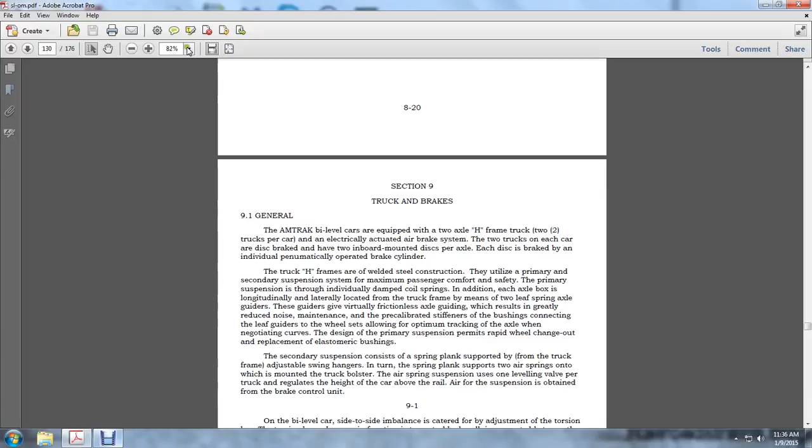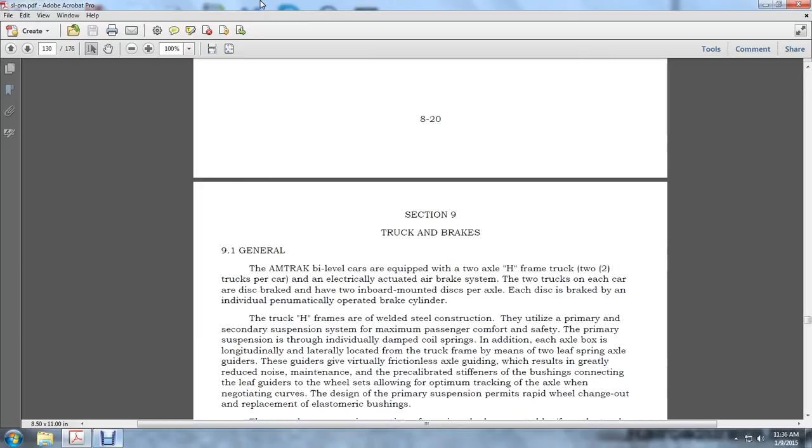Section 9, Truck and Brakes. General: the Amtrak bi-level cars are equipped with two-axle, H-frame, two trucks per car, and an electrically actuated air brake system. The two trucks on each car are disc brake and have two inboard mounted brake discs per axle. Each disc is braked by an individual pneumatically operated brake cylinder.

The truck H-frame is welded steel construction and utilizes a primary and secondary suspension system for maximum passenger comfort and safety. The primary suspension is formed by individual damped coil springs. In addition, each axle box is longitudinally and laterally located from the truck frame by means of two leaf spring axle guiders.

The guiders give virtually frictionless axle guiding, which results in greatly reduced maintenance, and pre-calibrated stiffness of the bushing connections of the leaf guiders to the wheel set allows optimum tracking of the axle negotiating curves. The design of the primary suspension permits rapid wheel set replacement and elastomeric bushings.

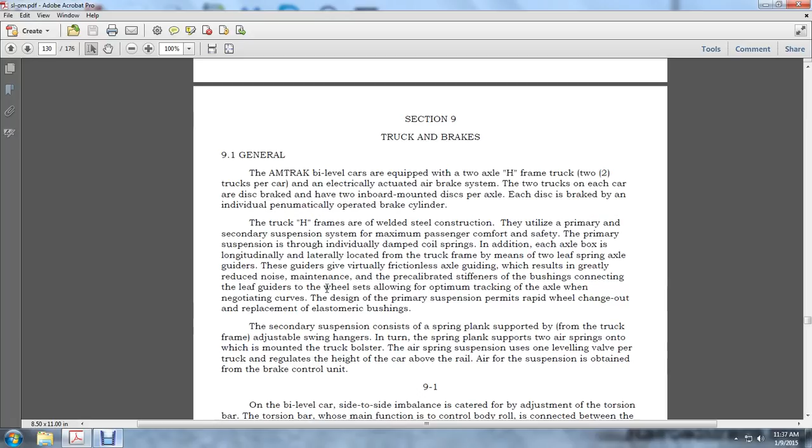The secondary suspension consists of a spring plank supported by the truck frame, adjustable swing hangers, and the spring plank in turn supports two air springs onto which is mounted the truck bolster. The air spring suspension, using one leveling valve per truck, regulates the height of the car above the rail. Air for the suspension is obtained from the brake control unit.

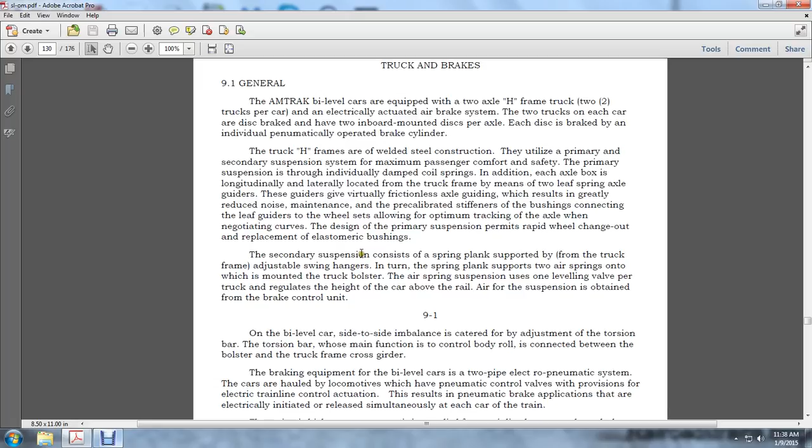On the bi-level car, side-to-side imbalance is catered for by adjustment of the torsion bar. The torsion bar, whose main function is to control body roll, is connected between the bolster and the truck frame cross girder. The brake equipment of the bi-level car is a two-pipe electro-pneumatic system.

These cars are hauled by locomotives with pneumatic control valves with provisions for electric trainline control actuation. The result is pneumatic braking applications that are electrically initiated or released simultaneously at each car of the train. The main air high pressure reservoir is supplied with trainline pressure through the car supply line. It receives air pressure from the locomotive air compressor and maintains the supply reservoir at 130 to 150 psi.

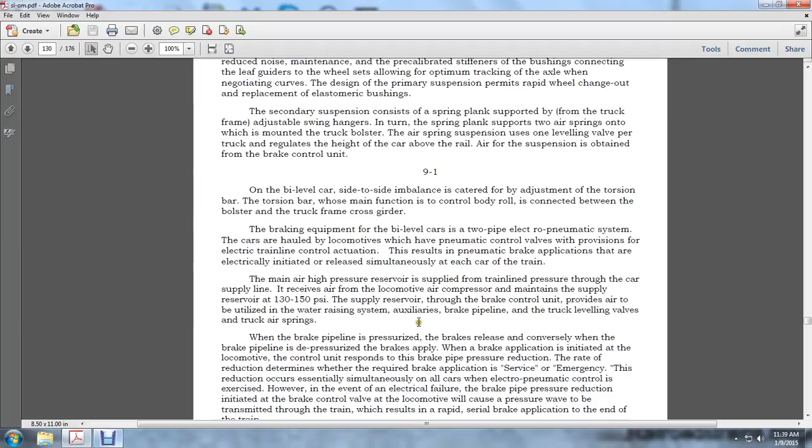The supply reservoir, through the brake control unit, provides the air utilized in the water raising system, auxiliaries, brake pipeline, and the truck leveling valves and truck air springs. When the brake pipe is pressurized, the brakes release. When the brake pipe is depressurized, the brakes apply. When a brake application is initiated at the locomotive, the control unit responds to the brake pipe pressure reduction. The rate of the reduction determines whether the required braking application is service or emergency. This reduction occurs essentially simultaneously on all the cars.

when electro-pneumatic control is exercised. However, in the event of electrical failure, the brake pipe pressure reduction initiated by the brake control valve of the locomotive will cause a pressure wave to be transmitted through the train, which will result in rapid serial braking application to the end of the train.

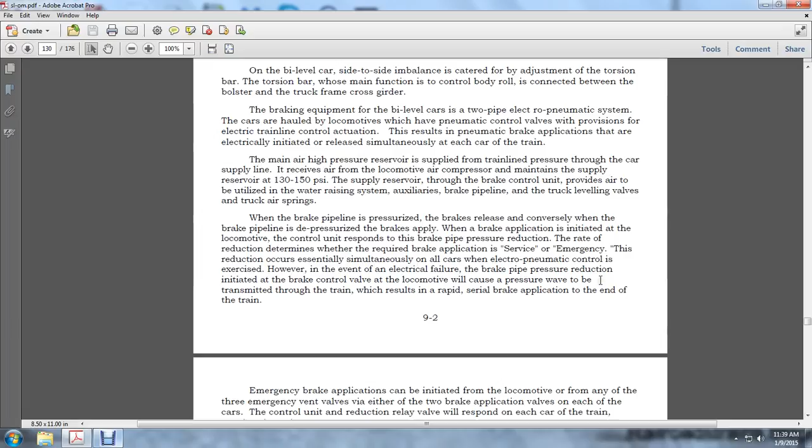A train emergency brake application is initiated from the locomotive or from any of the three emergency vent valves, via either of the two brake application valves. In each case, the control unit reduction relay responds on each car of the train, causing an emergency stop.

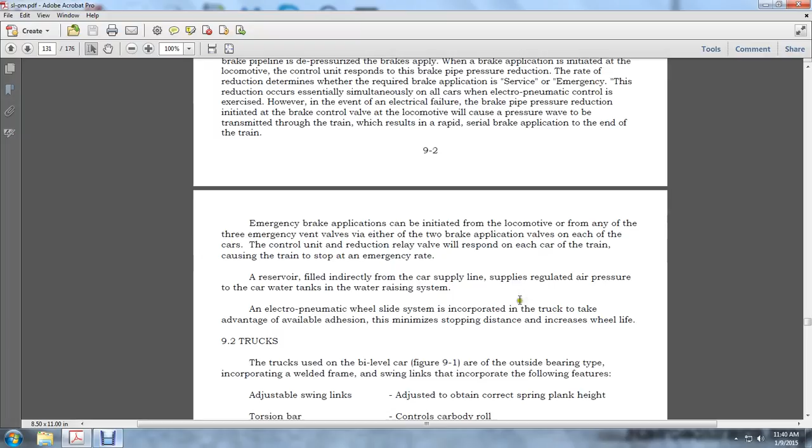The reserve, filled indirectly from the car supply line, supplies regulated air pressure to the car water tanks in the water raising system. The electro-pneumatic wheel slide system incorporated with the truck takes advantage of available adhesion, minimizing stopping distance and increasing wheel life.

9.2, The Trucks. The trucks of the bi-level car are the outside bearing type, incorporating a welded frame and swing links, incorporating the features: adjustable swing links to obtain the correct spring plank height; the torsion bar to control car body roll; hydraulic shock absorbers to damp oscillation; primary and secondary suspension, the primary suspension controlling wheel-rail interaction.

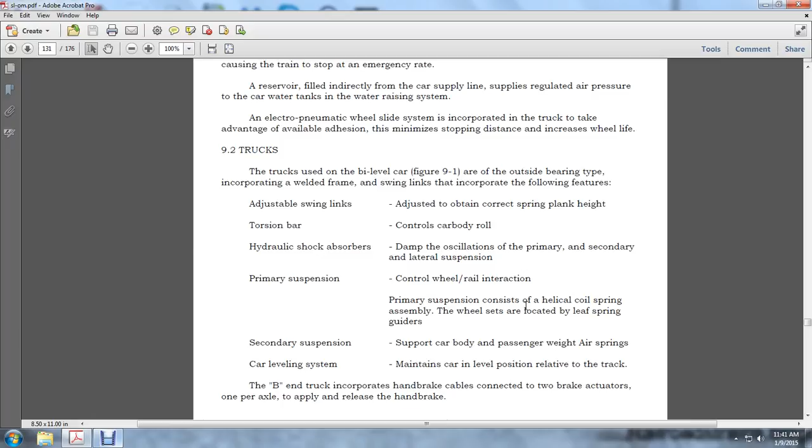The primary suspension consists of helical coil springs, with the wheel sets located in leaf spring guiders. The secondary suspension carries car body and passenger weight on air springs, with a car leveling system that maintains the level position relative to the track. The B end of the truck incorporates the handbrake control cables connected to two air brake actuators, one per axle, to apply and release the handbrake.

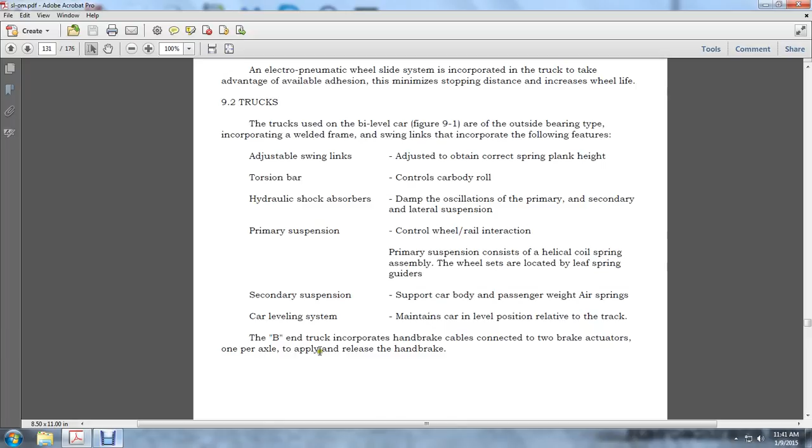Back out of this one sec.

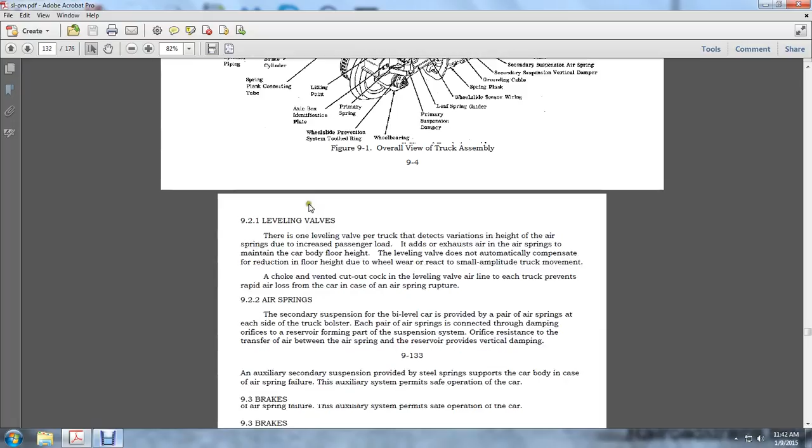9.2.1 Leveling valves. One leveling valve per truck compensates for the variation of the height of the air spring due to increased passenger load, adding or exhausting air in the air springs to maintain the car body floor height. The leveling valve does not automatically compensate for the reduction of floor height from wheel wear, or react to small amplitude truck movement.

The choke of the cutout cock of the leveling valve in the airline of each truck prevents rapid air loss from the car in case of an air spring rupture.

9.2.2 The air springs. The secondary suspension of the bi-level car is provided by a pair of air springs at each side of the truck bolsters, and each of the pair of air springs is connected by a damping orifice to a reservoir forming part of the suspension system. Orifices resisting the transfer of air between the air spring and the reservoir provide the vertical damping.

An auxiliary secondary suspension provides steel spring support of the car body in case of air spring failure. The auxiliary system permits the safe operation of the car.

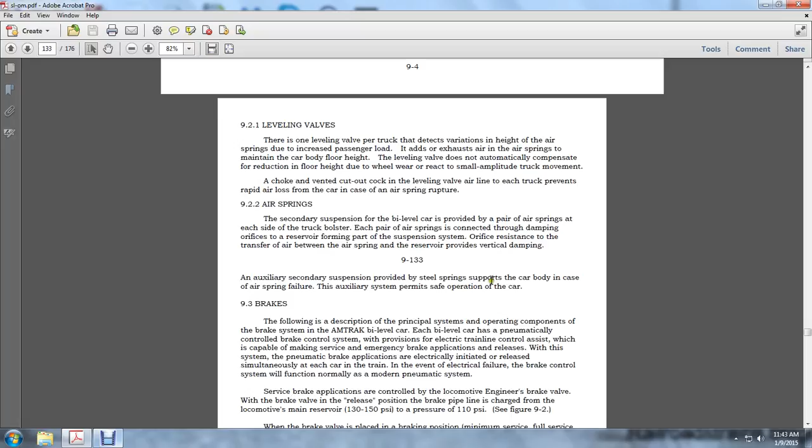9.3 The brakes. The following is a description of the principal operating components of the brake system of the Amtrak bi-level car. Each bi-level car has a pneumatically controlled brake system, which provides electrical train line control assist and is capable of making service and emergency applications and releases. With this system, pneumatic brake applications are electrically initiated and released simultaneously at each car. In the event of electrical failure, the brake control will function normally as a modern pneumatic system.

Service brake application is controlled by the locomotive engineer's brake valve. With the brake valve in the release position, the brake pipeline is charged from the locomotive main reservoir at 130 to 150 psi, to a pressure of 110 psi. The brake valve is placed in the brake positions: minimum service, full service, suppression, handle off, or emergency, to initiate the separate braking functions.

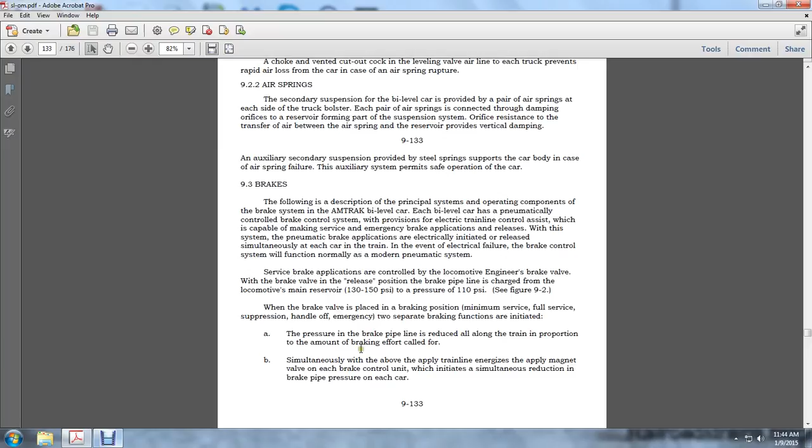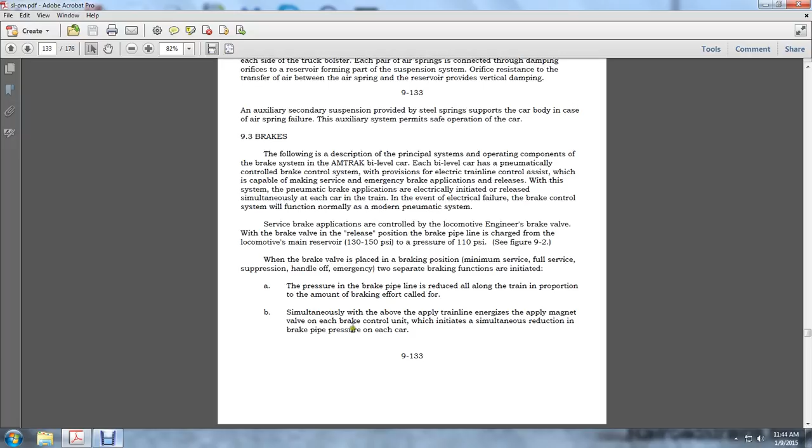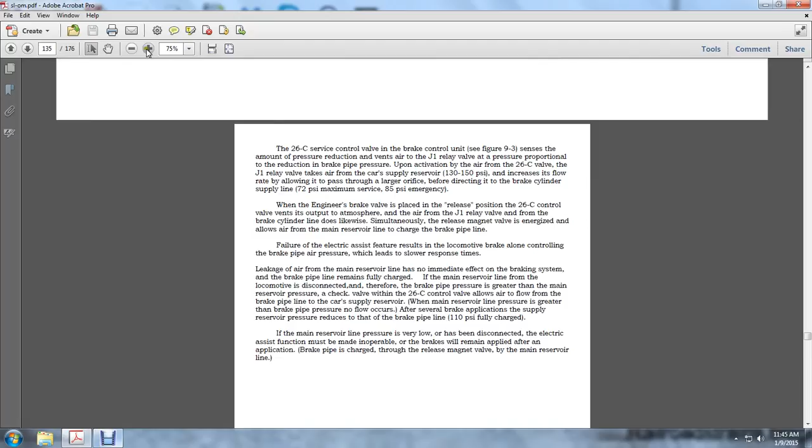26-C service control valve in the brake control unit. Sensitive to the amount of pressure reduction, it vents air to the J1 relay valve in proportion to the reduction of the brake pipe upon activation of the 26-C valve. The J1 relay valve takes air from the car supply reservoir and increases the rate, allowing passage through the large orifice before directing the brake cylinder supply to 72 psi maximum service, 85 psi emergency.

When the engineer's brake valve is placed in the release position, the 26-C valve vents to atmosphere the air for the J1 relay, and the brake cylinder line does likewise. Simultaneously the release magnet is energized, which allows the main reservoir line to charge the brake pipe. The electrical assist aids the locomotive braking, which otherwise controls brake pipe air pressure alone and leads to slower response time. Leakage of the main reservoir air has no immediate effect on the braking system.

The brake pipe remains fully charged if the main reservoir line from the locomotive is disconnected. When the brake pipe pressure is greater than the main reservoir pressure, a check valve of the 26-C control valve allows air to flow from the brake pipe to the car supply reservoir. When the main reservoir pressure is greater than the brake pipe pressure, no flow occurs. After the brake application, the supply reservoir pressure reduces to that of the brake line, at 110 psi fully charged.

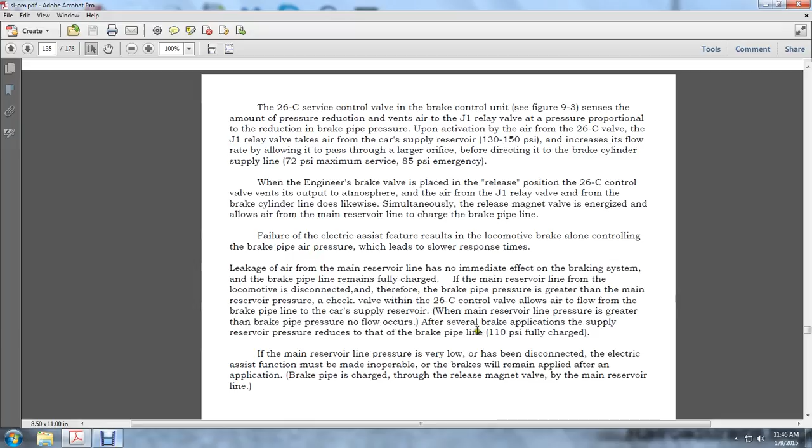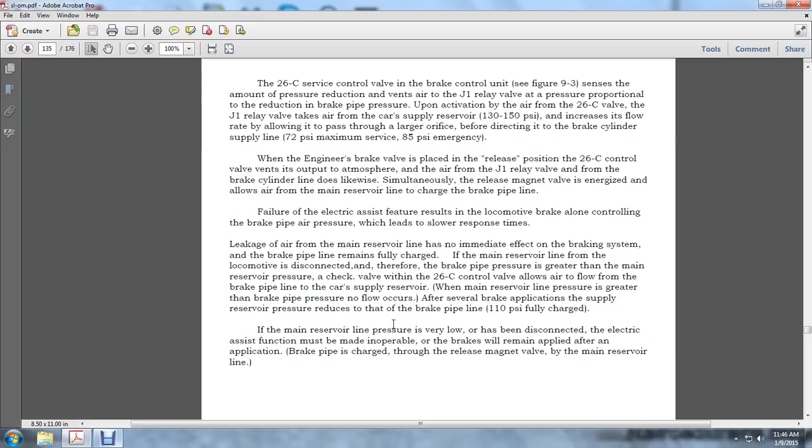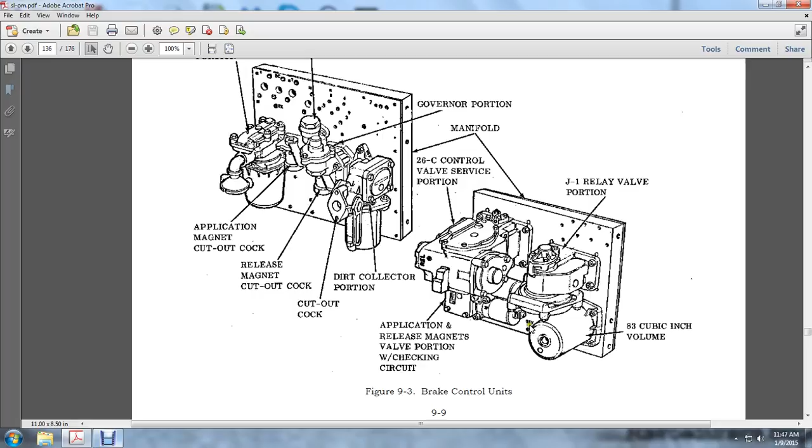Dirt collector portion, cutout cock, release magnet cock, application magnet cock. These are usually the brake control units. See this in the front of the locomotive with the glad hand and everything. The 26-C control valve service portion, the J1 relay valve, the 83 cubic inch volume, application release magnet valve portion, and circuit.

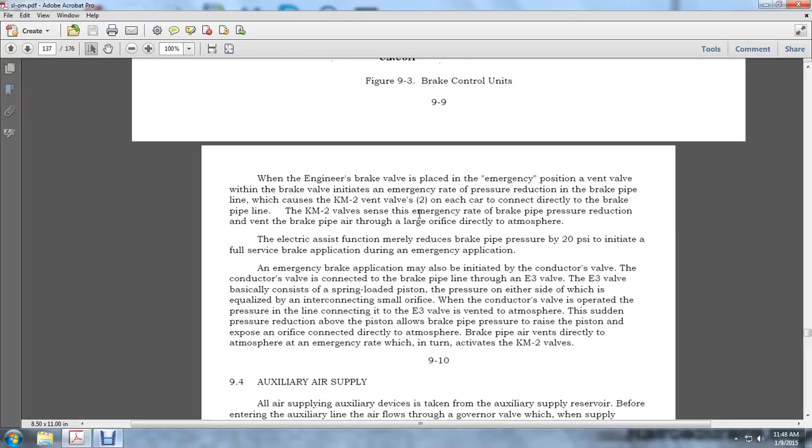When the engineer places the brake valve in emergency position, the vent valve initiates the emergency rate of brake pipe reduction, in which case the KM2 valve on each car connects directly to the brake pipeline. The KM2 valve senses the emergency rate of brake pipe pressure reduction and vents the brake pipe air through the large orifice to the atmosphere.

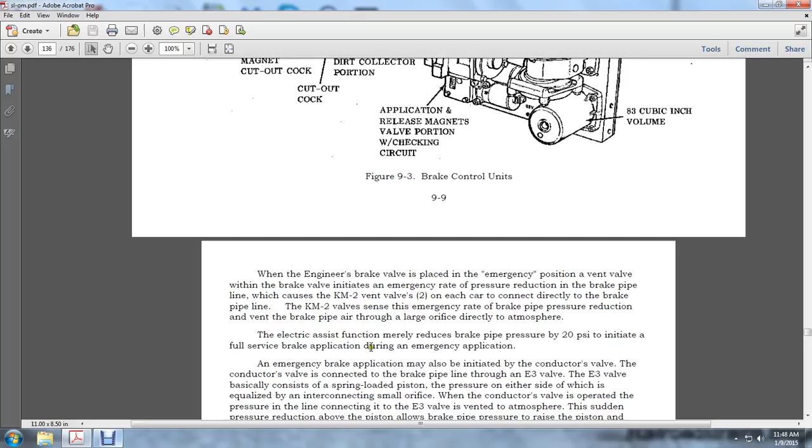So you got this KM2 valve in an emergency position. Electrical assisted function merely reduces the pipe pressure by 20 psi, initiating the full service brake application during the emergency application. An emergency brake application can be initiated with the conductor valve. The conductor valve is connected with the brake pipe line through the E3.

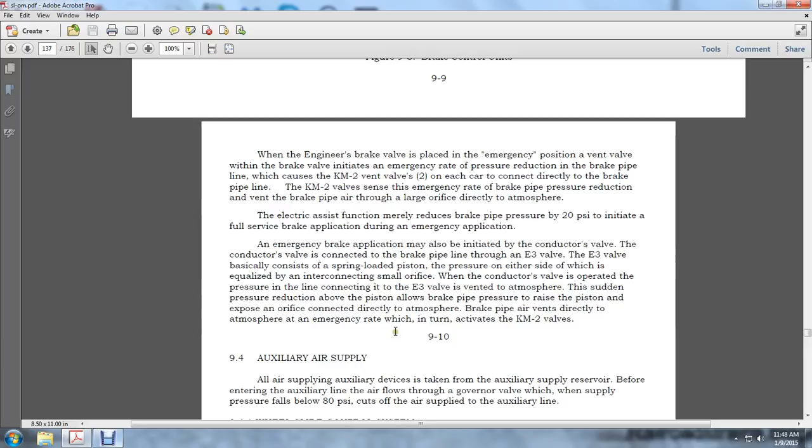The E3 basically consists of a spring-loaded piston, the pressure on either side of which is equalized through interconnecting small orifice. When the conductor valve is operated, the pressure connecting the E3 valve is vented to the atmosphere. The sudden pressure reduction allows the brake pipe to raise the piston, exposing an orifice connected directly to the atmosphere. The brake pipe air vents directly to the atmosphere at the emergency rate, activating the KM2 valves.

The auxiliary air supply. The auxiliary air supply is taken by the auxiliary supply reservoir before entering the auxiliary line. Air flows to the governor valve, which, if the supply pressure falls below 80 psi, cuts off the air supply to the auxiliary line.

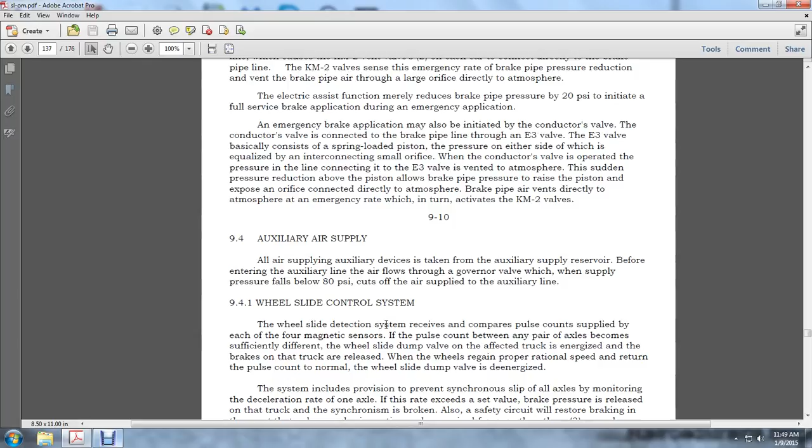And 9.4.1, wheel slide control. The wheel slide detection system receives the pulse count supplied by each of the four magnetic sensors. If the pulse counts between the axles become sufficiently different, the wheel slide dump valve of the affected truck is energized and the brakes of the truck release. When the wheels regain proper rotational speed, the pulse count returns to normal.

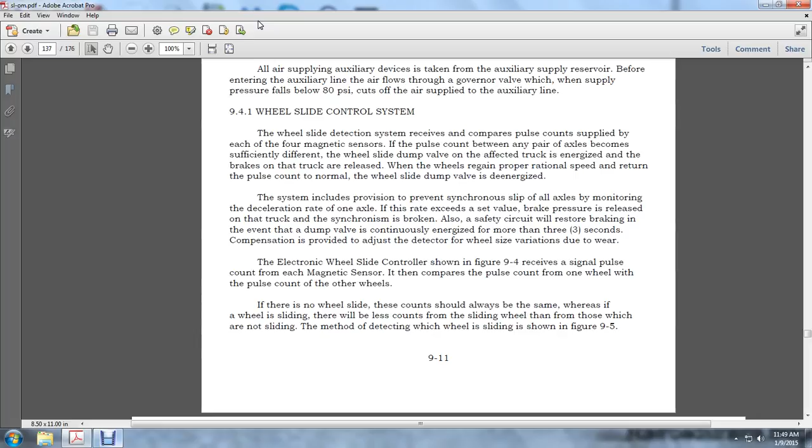The wheel slide dump valve is de-energized. The system includes a provision to prevent synchronized slip of the axles, monitoring the deceleration rate of one axle. If this rate exceeds the set value, the brake pressure is released on the truck and the synchronizing is broken. Also, safety circuits restore the braking if the dump valve is continuously energized for more than 3 seconds. Compensation is provided to adjust the detector for wheel size variation due to wear.

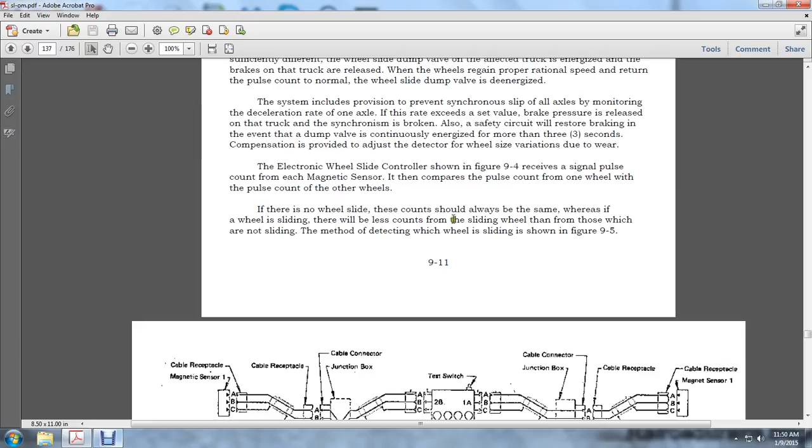The electronic wheel slide controller shown in figure 9.4 receives a signal pulse count from each magnetic sensor. It compares the pulse counts of one wheel to the pulse counts of the other wheels. If there is no slide, the counts should always be the same, whereas with wheel sliding, fewer counts will be counted for the sliding wheel than for those which are not sliding. The method of detecting wheel sliding is shown in figure 9.5.

Here you see 9.4, the wheel slide control schematics. Note the controller is located in the electrical locker. The receptacles A, B, and C in the front of the B end, with the wheel slide valve, wheel slide dump valve, and through a cable connector to the junction box of the cable receptacles on both the A and B side, with A, B, and C receptacles going from the 4 marked spots, which are the cable receptacles that test for the wheel slippage when it's at different speeds.

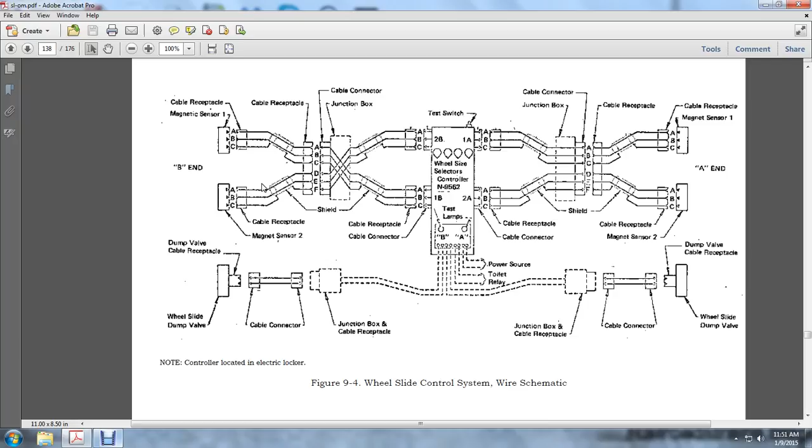The cable receptacles go into the cable connector junction box, and from the junction box, the 4 spots of the wheels that they test on each A and B side go into the wheel size selectors controller N-8562, 1B, test lamps of B and A switches. This is the wheel slide control wire schematic.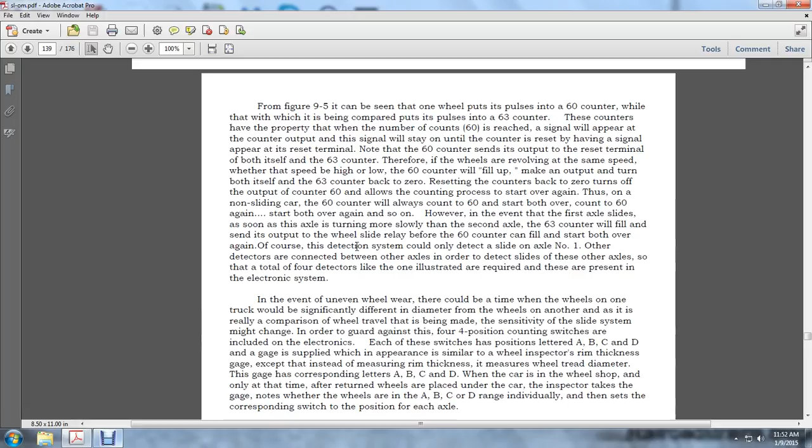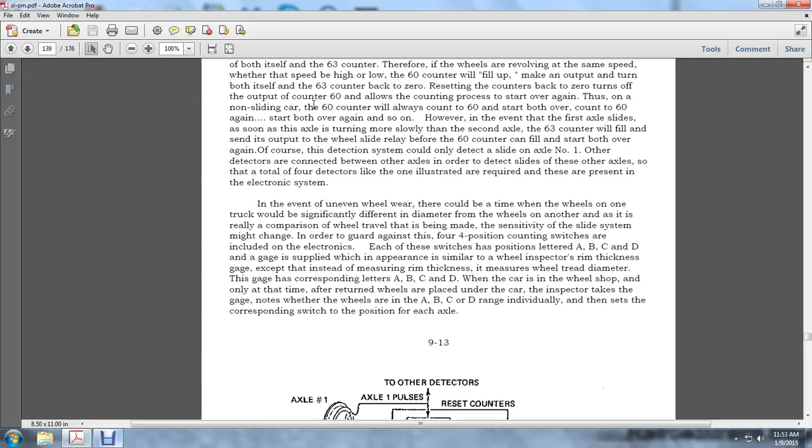The wheel car goes to the wheel shop. Only the wheels that return are placed under the car. The inspector takes the gauge and notes that the wheels are A, B, C, or D, gauging them individually, then sets the corresponding switch position for each axle.

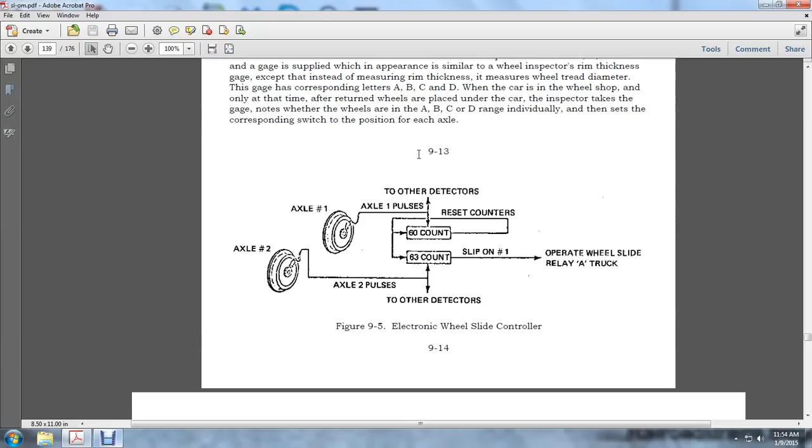Since it's a digital rather than an analog system, there is no necessity for calibration or fine tuning of any kind. It is never necessary to reset calibration switches between wheel turnings, because the amount of wheel wear between turnings is only 1/2 an inch.

The system will operate successfully with that much difference between the wheels without necessity to change the compensation switch position, and it is necessary to protect the dump valves against false energization.

This is because if the wheel slide system failure energizes the dump valve for an extended period of time, the braking on the car would be reduced by 50%.

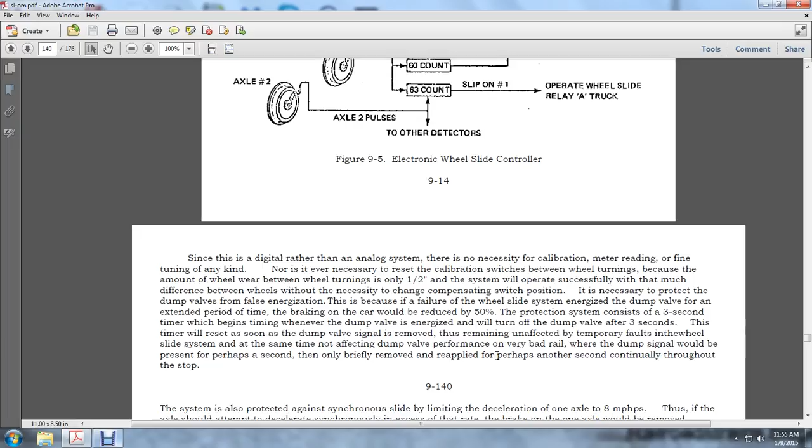The system also protects against synchronized slide, limiting deceleration on one axle to 8 miles per hour per second. Thus, should the axle attempt to decelerate synchronized in excess of that rate,

9.4.2 water raising system. Air flows from the auxiliary line of the water tanks through the pressure reducing valve, which reduces pressure from 130-150 psi down to 40 psi. The supply also feeds the buffer volume at 40 psi. The line contains a safety valve to prevent over-pressurizing the water tank, and cutting-out cocks for depressurizing the tanks while filling inside the car.

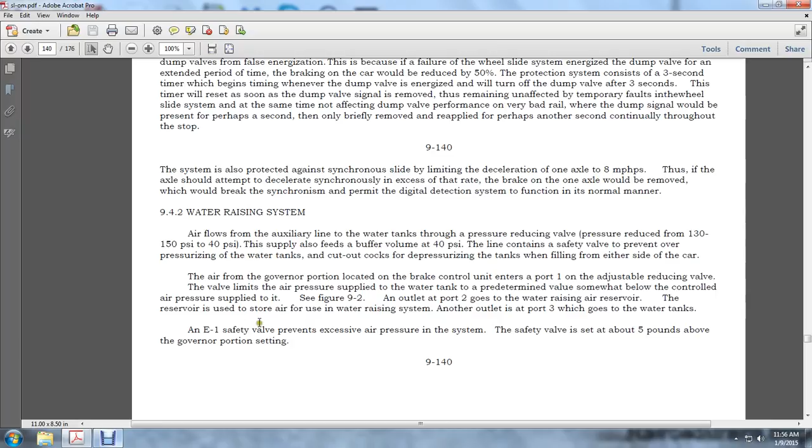Another outlet is port 3, which goes to the water tanks. The E-1 safety valve prevents excessive air pressure in the system, and is set at 5 pounds above the governor portion setting.

Here is an overall truck view. You have your truck bolster, dump valve assembly, side bearing, center plate, brake disc, wheel set, truck frame, lateral stop, torsion rod, safety hanger, truck identification plate, secondary suspension, air spring, secondary suspension vertical damper, grounding cable, spring plank, wheelslide sensor wiring, and leaf spring guides, primary suspension damper, wheel bearing.

Wheel sliding, teeth wheel, primary spring, axle box identification plate, lifting point, spring plank connecting tube, brake cylinder piping, brake caliper assembly, disc pad.

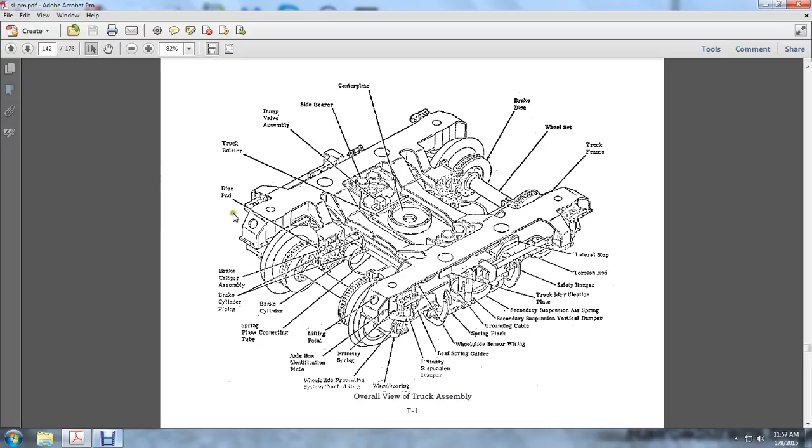And here you see the calipers, torsion bar, hangers, lateral stops, and cable assembly guides.

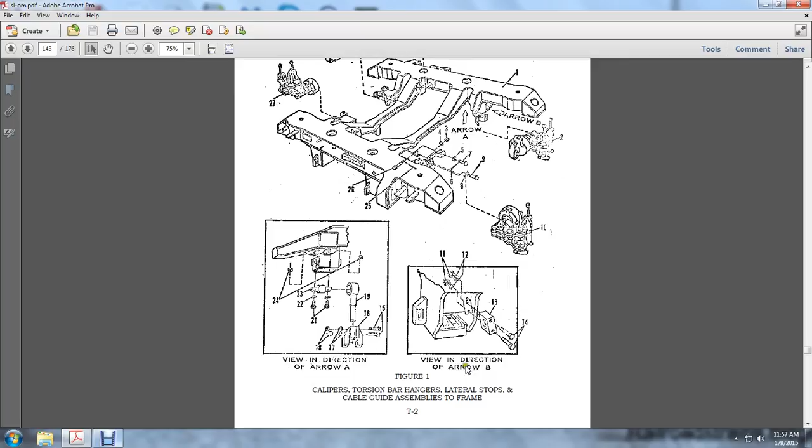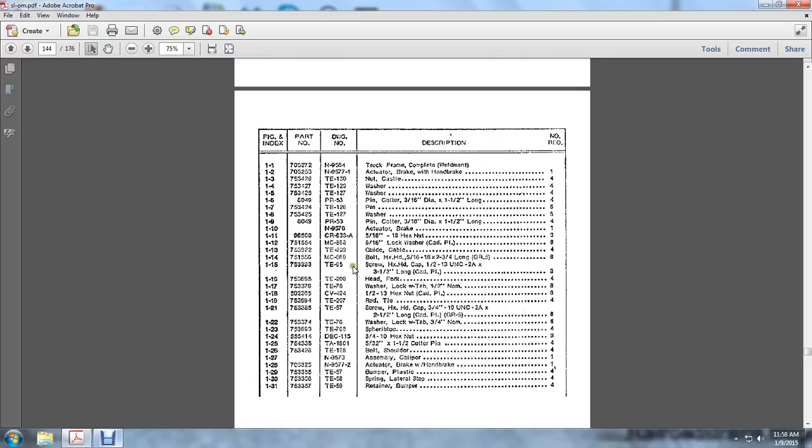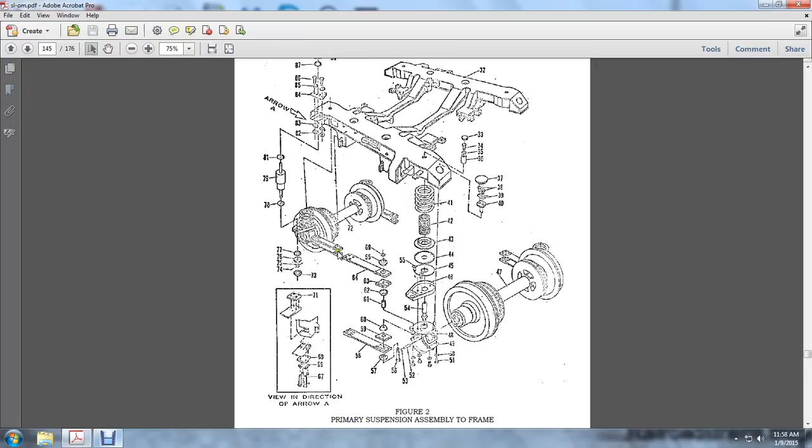Basically left and right bolster springs for each, underneath the truck, holding up the wheel journal cases.

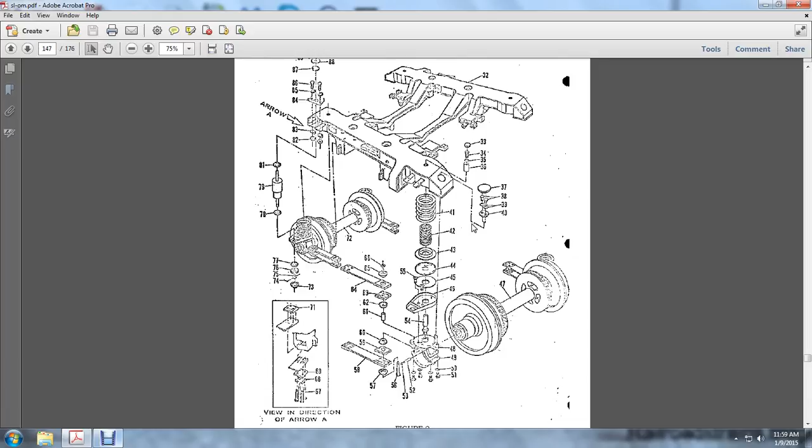Here's another picture of the primary suspension assembly. You've got your laps, your side bearing, spring inside, wheel journal case going around that - the wheel journal casing suspension shown in the direction of arrow A.

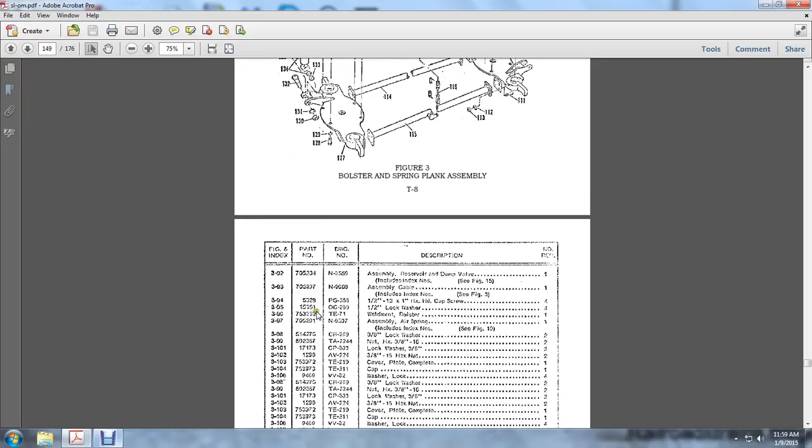Another list of NSN parts. Bolster spring plank assembly - this is the center plate, the center casting plate. 1410 - what is 1410? The nut, hexagonal. You have your center bolster, the center plate, the drafting gear housing right here.

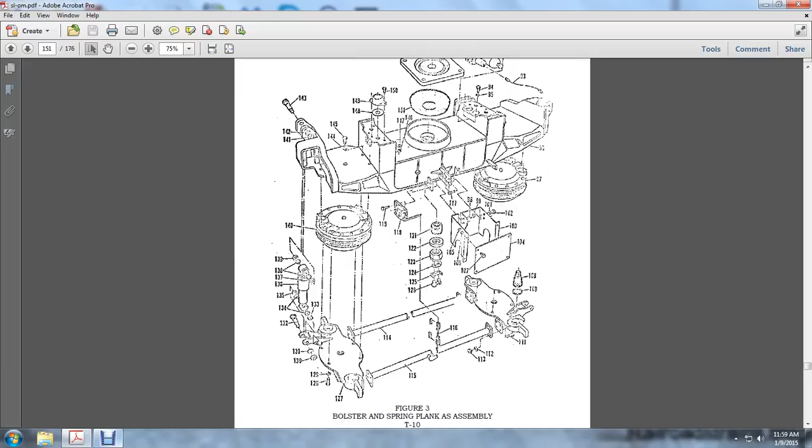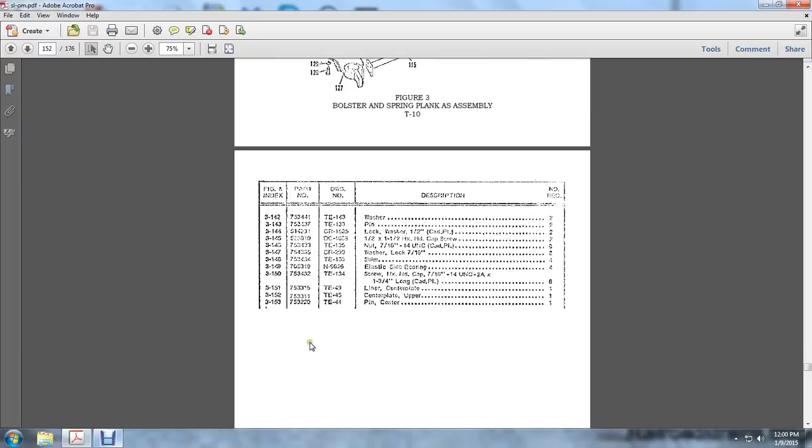Imagining the Amtrak is a little different from the maintenance car railway that I've looked at.

Once again, suspension, air brake. This comes down to the air brake valve, air compressor valves or whatever, and cylinder.

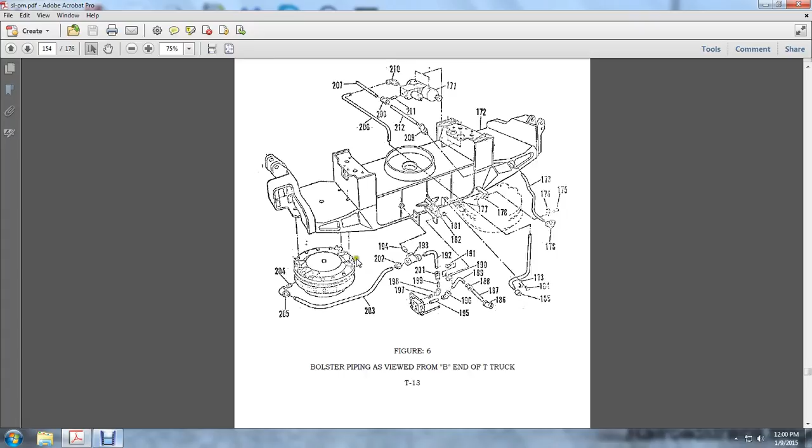This here is a valve for the center journal bearings, bolster pins, B end of the truck. This is the A end of the truck - same center bolster with the two big old things around there. I guess those are springs underneath the laps.

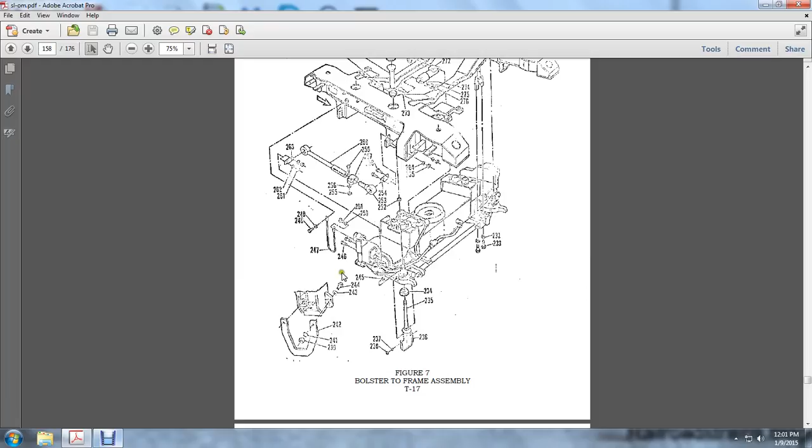This is the side frame, bolster frame assembly. You have your spring lap right there, your spring lap vertical adjuster, and you've got all the detectors and stuff on there.

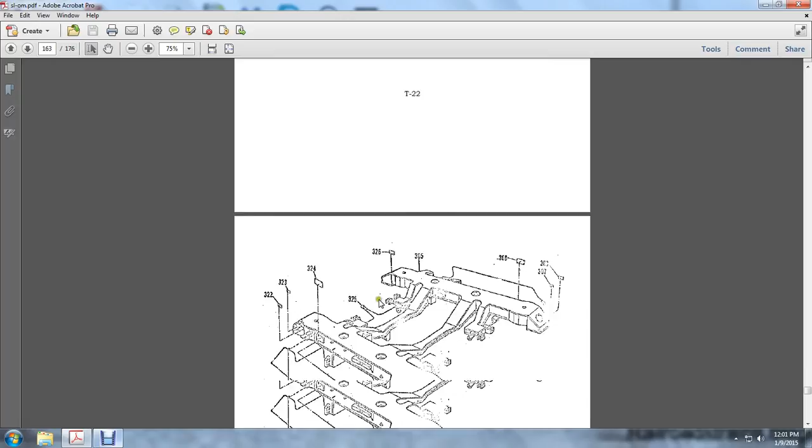Here is a wheelslip and nameplate, with nameplate details.

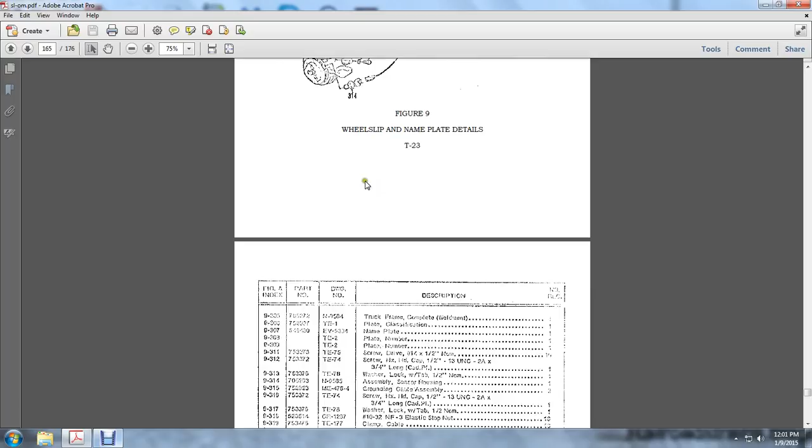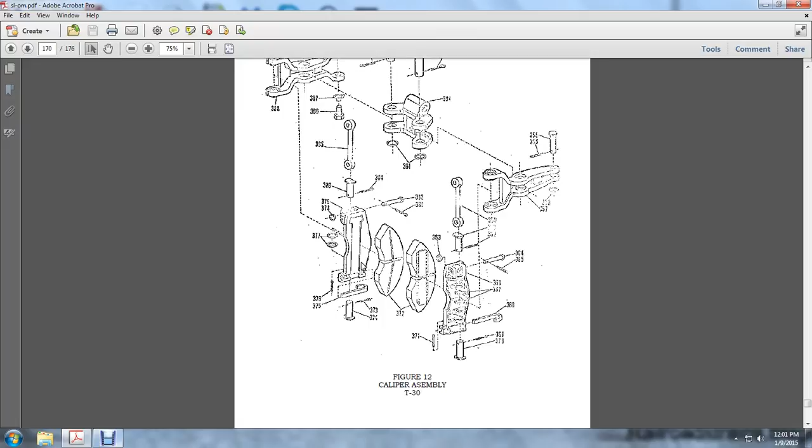These are a caliper assembly. These hold together the piston, spring pistons.

This right here is an actuator with a handbrake. Actuate the handbrake, or without the handbrake - that goes... actuator with the handbrake.

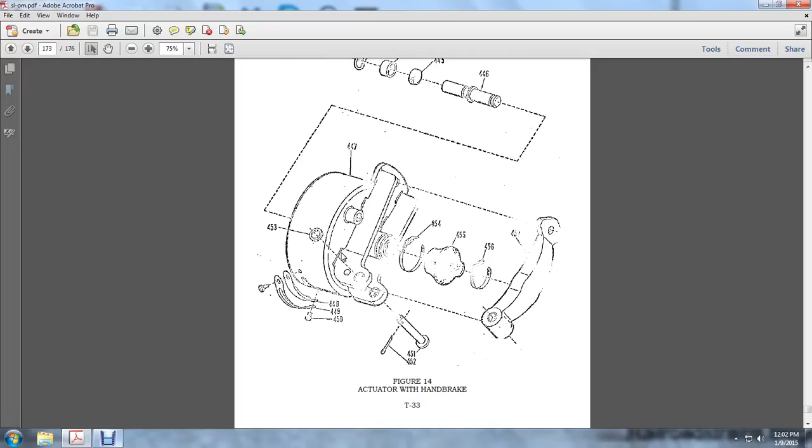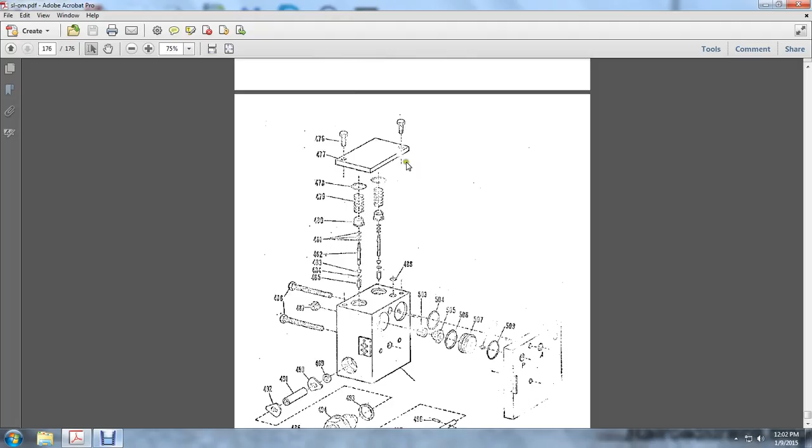Reserve and dump valve assembly. Cable assembly of the car body junction to the dump valve. This right here is a leveling valve assembly. And that is all.